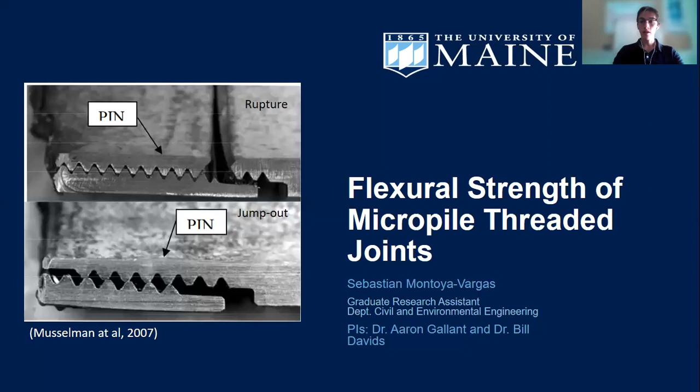Today's talk is going to be about a tiny piece of the research that is concerned with the flexural strength of micropile thread joints. So let's jump into it.

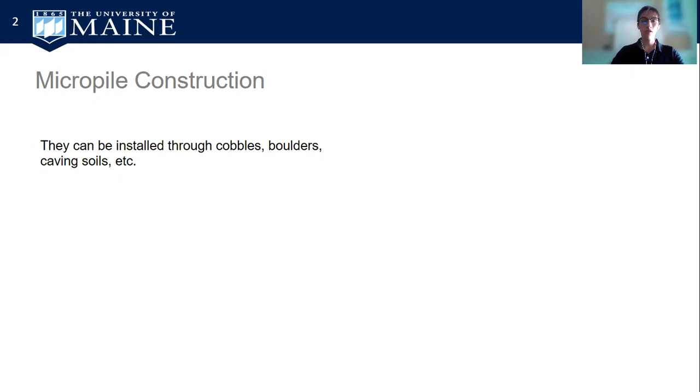Micropiles have several construction advantages. They can be installed through subsurface conditions that come with cobbles, boulders, caving soils, and can penetrate through rock. They also require low head clearance and introduce low vibration during installation.

And they are used to stabilize slopes, support integral abutment bridges, support offshore structures, and many other applications that impose bending loads on these elements.

So the question is, for substantial bending loading, is the joint strength going to be enough for adequate performance of the foundation system?

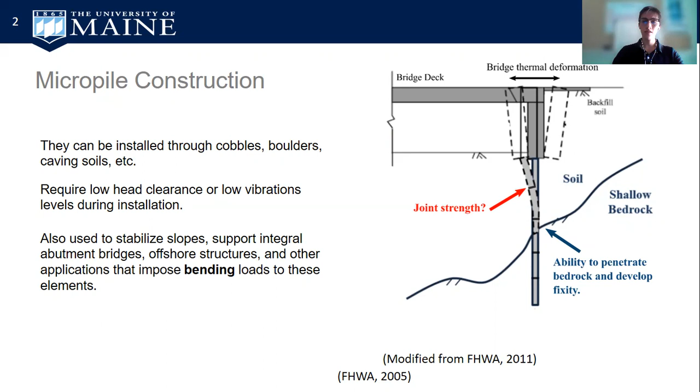If we take a look at the micropile, they are composed of segments, which are typically 5 to 10 feet long. At one of the ends of each segment there's a box end, and the other is what we call the pin end.

Both of them match so that the joint can be created and the stress transfer can be attained. And this joint is typically 2 to 5 inches in length.

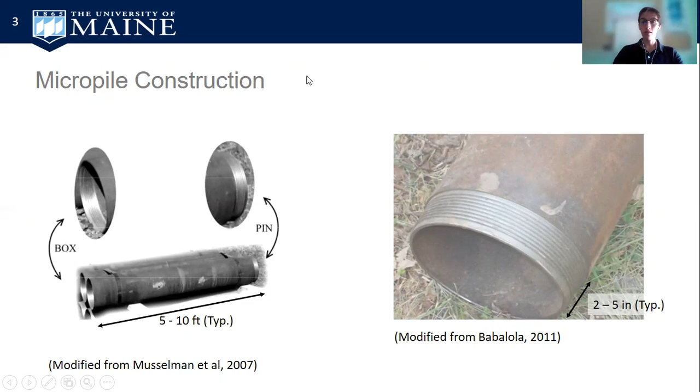During jump out, what happens is that there's some radial deformation of the box end, meaning it's dilating, which reduces the contact between the threads until they're no longer in contact.

And that makes the connection decouple. On the other hand, for rupture, what happens is that due to imperfections, area reduction, and stress concentrations, we develop a crack.

And once that crack propagates, rupture of the joint takes place, and then no longer bending capacity is possible.

So these failure modes take place in a brittle way, for bending loads much smaller than the gross section capacity. Here, gross section refers to the pipe, the intact pipe itself without the joint.

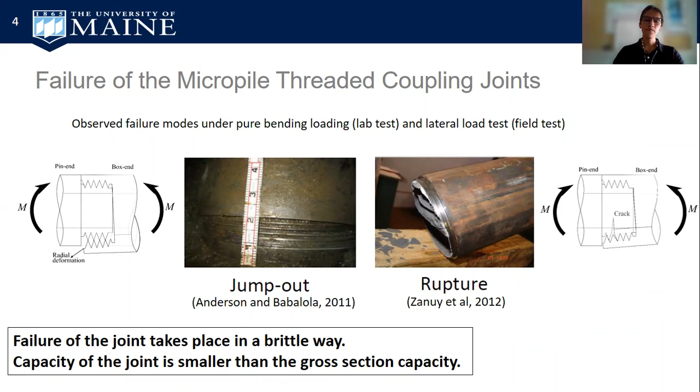We look for some advice on how to consider this source of structural weakness in the design. Probably one of the few we can find comes from the FHWA.

They state as a conservative approach that consists of assuming the wall thickness at the joint is just 50% of the intact casing thickness.

So if we look at the figure on the right, this recommendation means that the gross section is shown by the blue area. For design purposes at the joint, we are going to consider only the red area, which is just 50% of that.

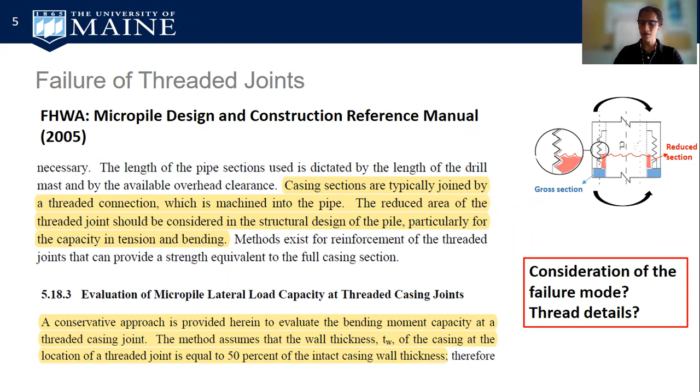But is this recommendation considering any failure mode? How is it accounting for the thread details, the thread size, thread shape, thread length? All these variables influence what the joint capacity will be and what the failure mode will be.

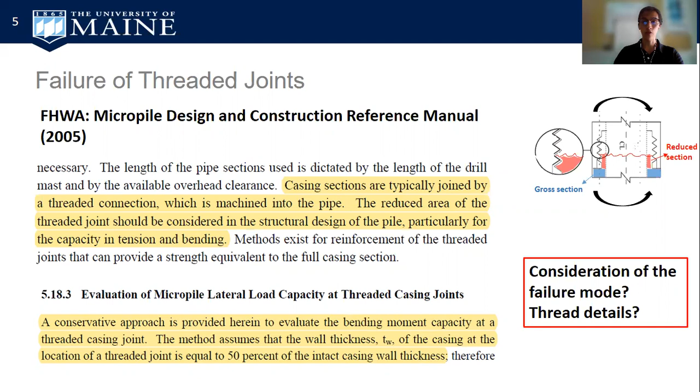And those recommendations were based on experimental 4-point bending tests that they performed on only 2 micropile types. So the question is, is this methodology proposed by Musselman applicable for any other type of micropiles?

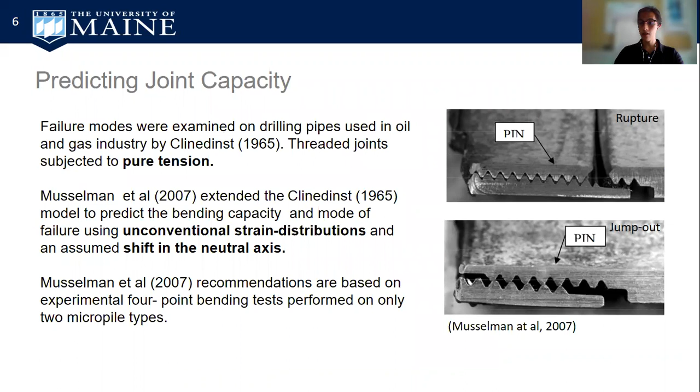Any other type of thread details and connections? And that's what we tried to address through this presentation.

So let's first review the Musselman model. The first assumption is what they call the effective cross-section. Instead of reducing the thickness through the whole joint, we are going to do that just for the region of the joint that is subject to tension.

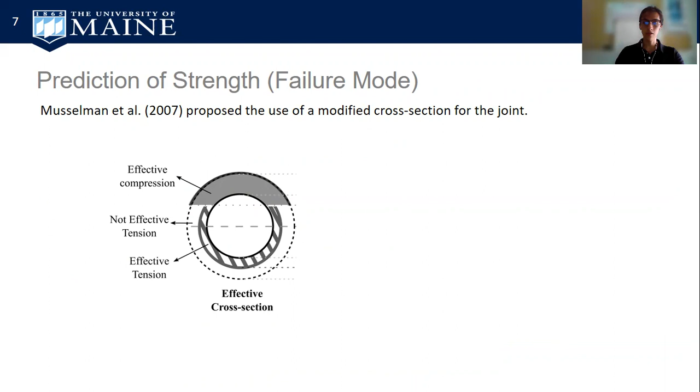So for compression, we are going to consider full thickness, but for tension, we are going to consider only a fraction of that thickness.

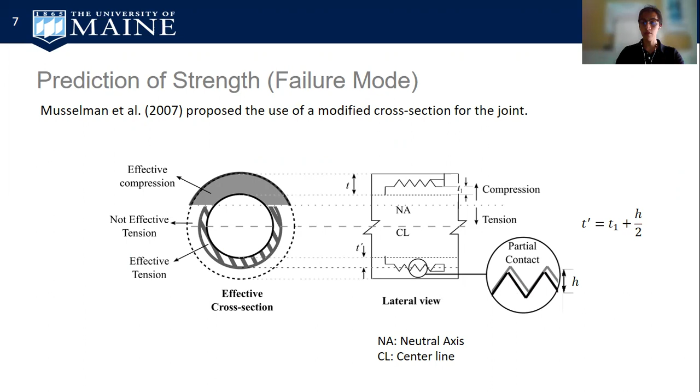This recommendation is based on the fact that during bending, the threads on the compression side attain full contact, but on the tension side the threads slip one over the other. That reduces the contact between the threads, and an easy way to account for that is just reducing the thickness.

The second assumption was the non-conventional strain distribution. Based on their observations, they described a bi-linear strain distribution shown here in figure B: essentially linear in compression and almost constant in tension.

Now we can introduce what the failure mode is. In tension, we assume the corresponding strain to jump out (subscript J) or rupture (subscript U). If we have a constitutive law, for instance an elastic-plastic relationship for steel, we can translate strains into stresses. So in tension we'll have the corresponding jump-out or rupture stress, depending on the failure mode.

For compression, we have to solve what the compression stresses are so that we accomplish equilibrium. That means no axial force is applied, or the resultant tension equals the resultant compression. If we attain that condition of equilibrium, we know what the stress distribution is, and we can compute what the bending moment at failure is in the joint.

Now, the only ingredients we need for this recipe are the rupture stress and the jump-out stress. Rupture is easy—that comes from elemental testing, a coupon test, which gives the ultimate tensile capacity. But what about jump out?

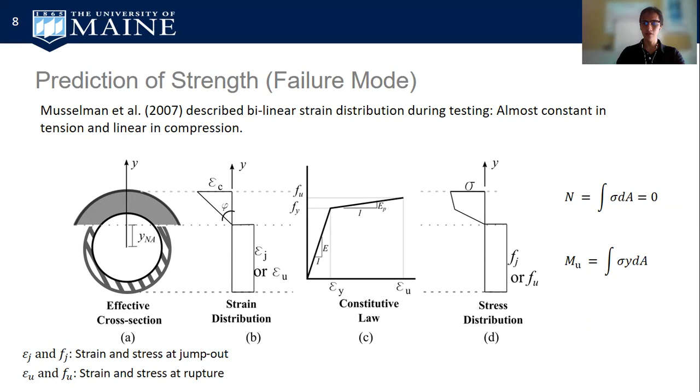The only thing we have available is the expression developed by Clinedinst for pure tension, and that's what we have here. Clinedinst related the axial stresses on a pipe that will induce jump out for a given geometry, also considering the circumferential or hoop stresses developed in the pipe. That's what the equation presents.

Although it seems complex, it can be decomposed into very simple pieces. In the numerator, we have a nonlinear axial stress relating the yielding and tensile capacity to the strains through parameters A and B. Now, inside the parentheses we have 2H over D.

H here is the thread size, D is the pipe diameter. So we are talking here about the jump-out strain.

In the denominator we have tan alpha minus psi. Alpha is the inclination of the threads, and psi is the friction angle. So this is essentially introducing friction among the threads, and we have some rational terms accounting just for the circumferential stress.

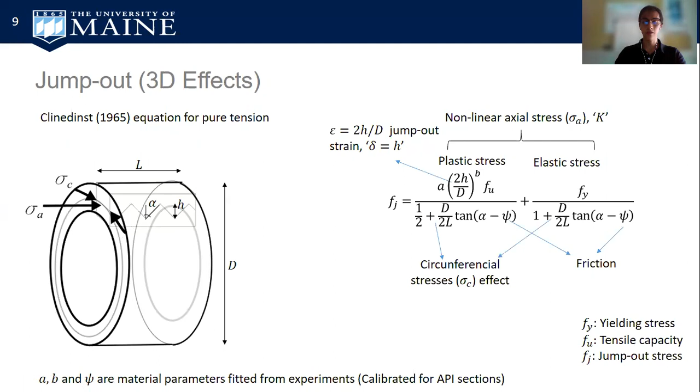And we have all we need to estimate bending capacity in the thread connection. That's what we did: we performed a model assessment by comparing the predictions with observations on 46 tests reported in the literature. 43 of them were 4-point bending tests performed at laboratories, and 3 of them were field pushover tests.

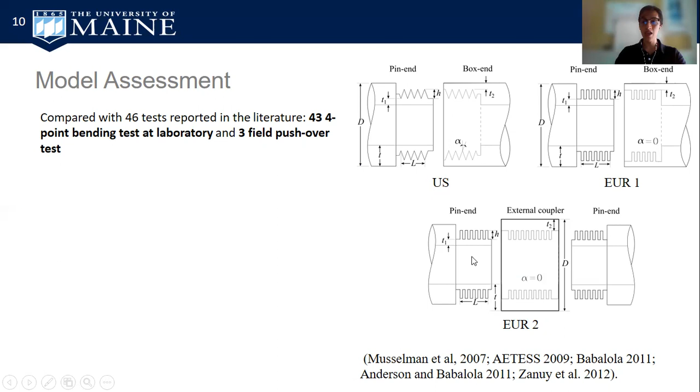These spanned over a wide range of pipe diameters, wall thicknesses, and different connection types with different thread geometry. For instance, we have what we call the US connection type, a pin-box connection with triangular threads, and Euro 1, a pin-box connection but with square threads. Similarly, Euro 2 is a pin connection with square threads and an external coupling.

So those are our results. On the vertical axis we show our prediction of thread joint capacity versus, on the horizontal, the observations of thread joint capacity. First, note that we grouped the 46 tests into 13 different types, depending on common diameters, geometry, and material properties.

Note that the P1 tests are the field tests. For field tests, you cannot really measure the bending moment at the joint at failure—what you can measure are strains and displacement. So what we report here are results from a finite element analysis back-calibrated with these measured strains and deformations. These observations carry considerable uncertainty.

Now, second thing to note here is that we have some clustering of data, which I highlight with the red box and the blue box.

A red box encloses all the tests that fail in rupture, while the blue box encloses all the tests that fail in jump out. Note that all the ones that fail in jump out are US connection types, triangular threads, while rupture, with the exception of one test, all correspond to Euro connection types.

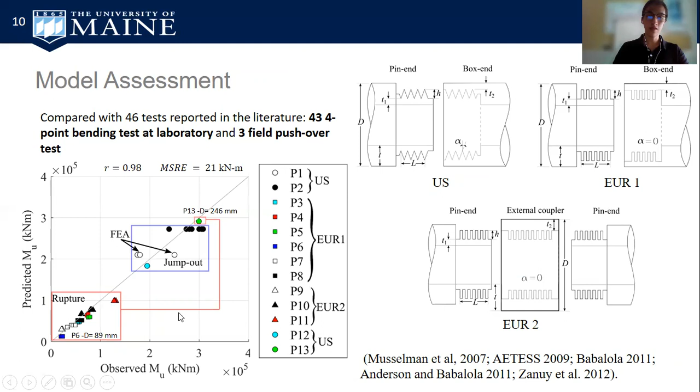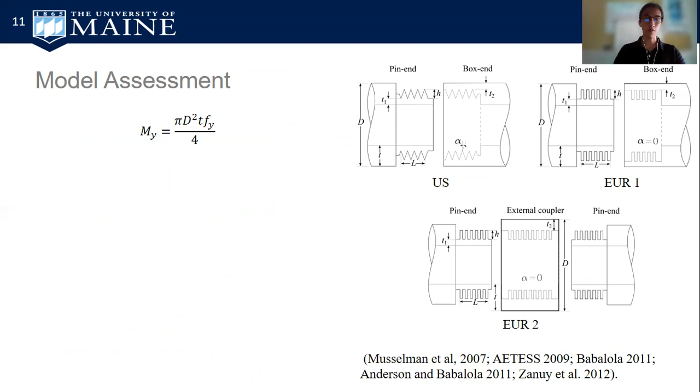Something to keep in mind, the message here is you have to account for the thread details if you want a conservative approach. Otherwise, you could end up with an unsafe design.

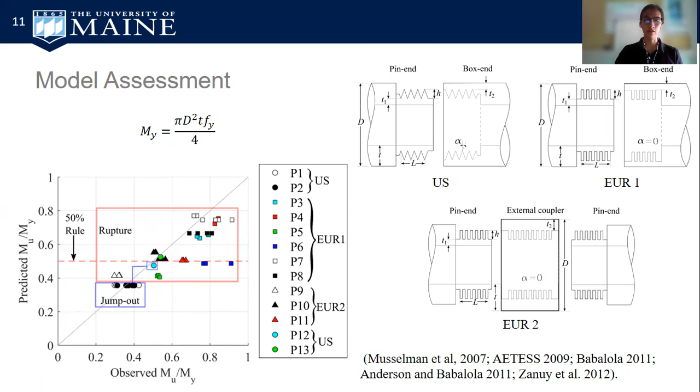In summary, I want to reiterate: first, the 50% thickness reduction is not always conservative. Second, the most influential parameter governing the failure mode was found to be the thread shape. Third, the geometric details can be optimized during the milling process to ensure rupture controls, achieving the highest capacity. Lastly, the present method provides a tool for predicting the flexural capacity of a thread joint.

Additionally, we can have substantial savings in structural testing, as currently the only way to know the capacity of the joint is to perform a test.

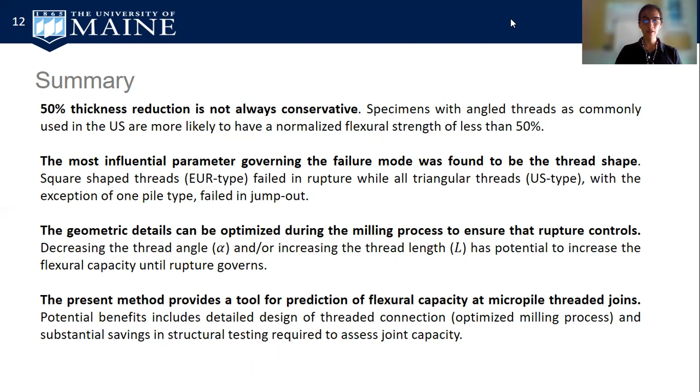Some potential future work will include the effect of axial load, as micropiles are subject to axial load simultaneous to bending. Second will be addressing the influence of a central reinforcing bar. Since we are predicting a shift of the neutral axis, even a bar located in the center of the section will contribute to bending capacity.

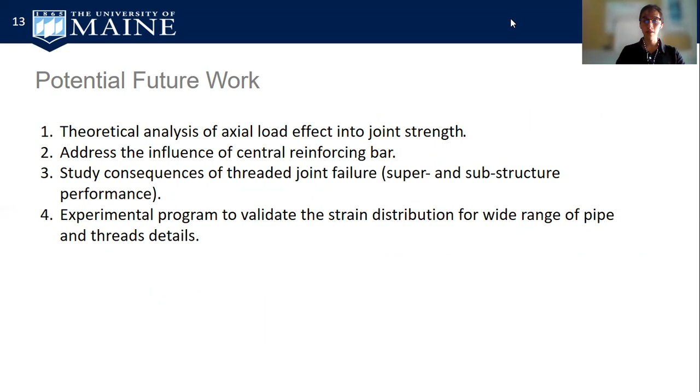The third point will be to study the consequence of failure, what the super and substructure performance will be when the thread joint fails. And last will be an experimental program to validate the strain distribution for a wide range of pipe and thread details.